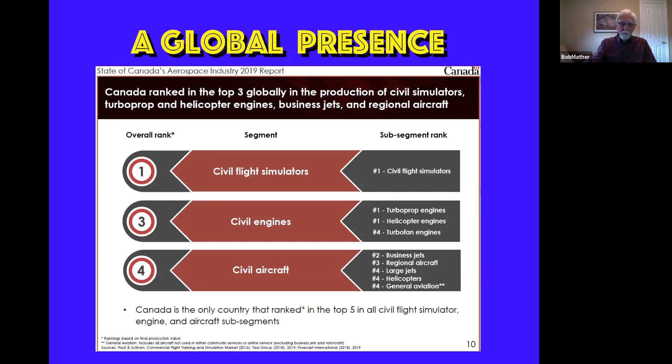Where does all this success come from? This comes from a gradual work over the years by many, many people. So I'm going to take de Havilland as an example of the way this success has appeared. Going from the Tiger Moth to the Q400, I call that a success story.

My career was mainly in engine design, manufacture, and certification, so there'll be a little bit of a bias towards that. We're going to take a somewhat narrow look at the industry, really. There's many other companies like Bombardier and Bell and CAE who've contributed their part as well. So we're going to take a look at what de Havilland has done over the years to start with.

1936 to 1945 is an example of how a branch plant of a foreign company builds success. Early de Havilland aircraft were shipped across the Atlantic in crates, assembled and test flown and shipped to their customers in Canada.

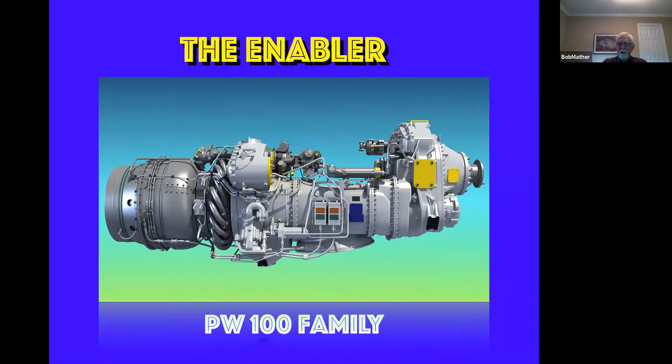I'm going to spend a little time later explaining where this engine came from and why it was designed the way it was. But first, I'll briefly go over the history of aircraft engines and aircraft propulsion.

Starting with the Wright brothers in 1903, they designed and built an engine of their own that produced 12 horsepower. They were smart because they thought their airplane would fly on only 8 horsepower, so they had a little power in hand. Won't dwell on that, because their success and what it led to is obvious.

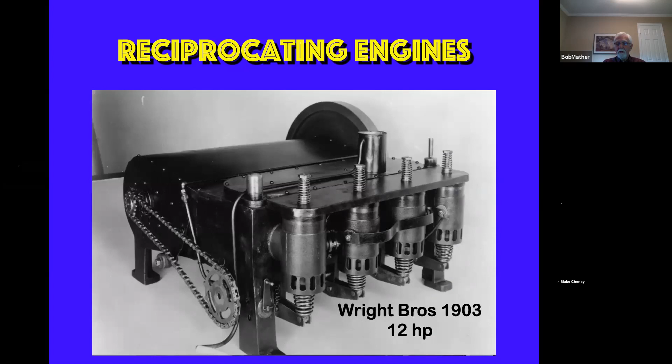As aircraft got more utilitarian and bigger and more useful, there was a need for more power, so they simply added more cylinders and made the engine progressively bigger. From 1903 to 1923, you've gone from 12 to 300 horsepower in the form of a large 12-cylinder engine built by Rolls-Royce.

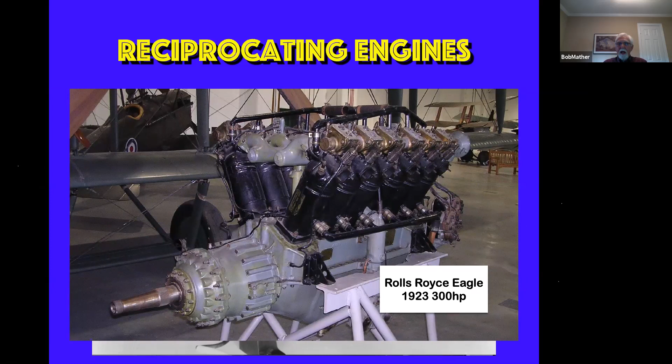The trend for adding cylinders and increasing performance continued, and somewhat later there's this radial engine with 18 cylinders. The performance and power-to-weight ratio was improved by adding a supercharger, which you can't see, it's at the back. The addition of a supercharger gives the engine more power at higher altitude. This is clearly an advantage in military terms, but also a great boon for civil aircraft, which can then fly at somewhat higher altitudes out of the weather.

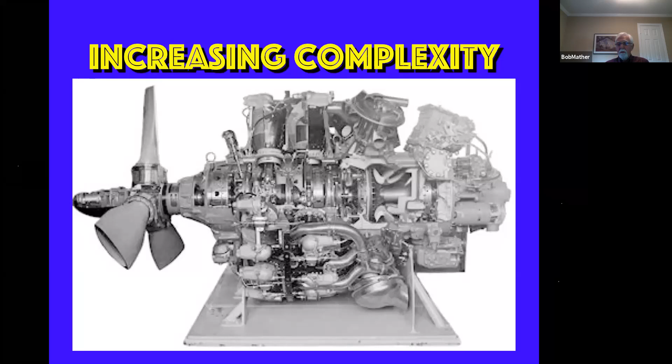This is kind of like going around in circles, but that turbine is coupled to the compressor that started the process off, which is also geared to the front of 2 propellers. So you've got a turbine system driving one propeller, the piston system driving a second one, and these are rotating in opposite directions for a perceived gain in propulsion efficiency.

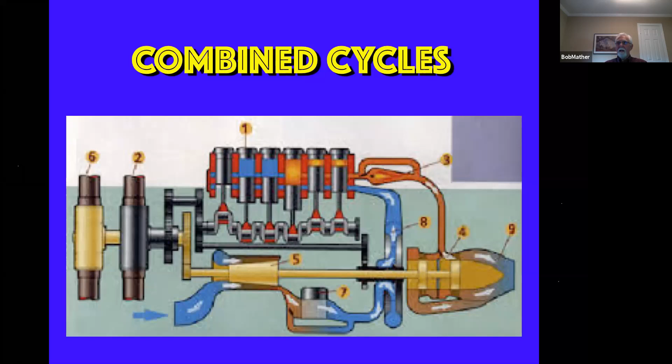This engine was called the Napier Nomad, and this is a picture of the engine as it was built. You can see the big bowl-shaped thing at the top right, that's the combustion system, and at the bottom, with the opening, is the turbine stage. The cylinders, laid out in opposing format, there are 12 of them. So you can see the complication of 12 cylinders, a combustion and turbine system, and 2 compressor systems.

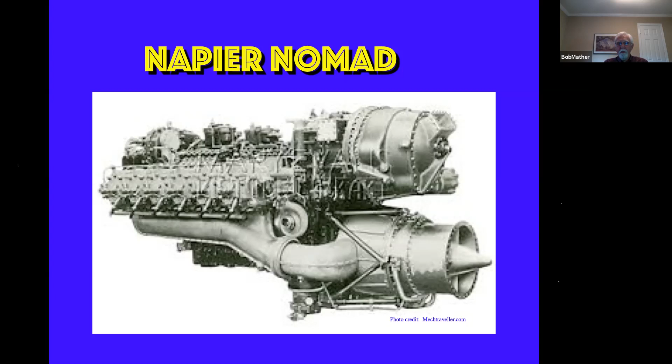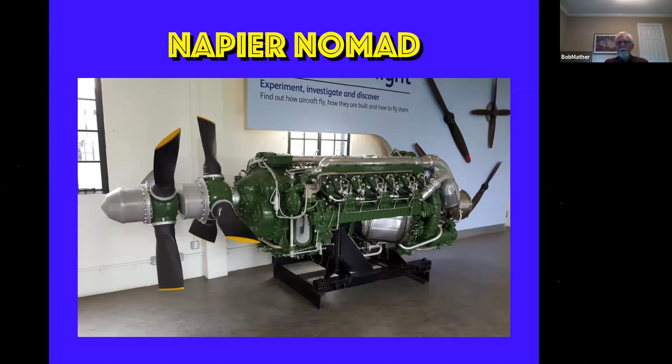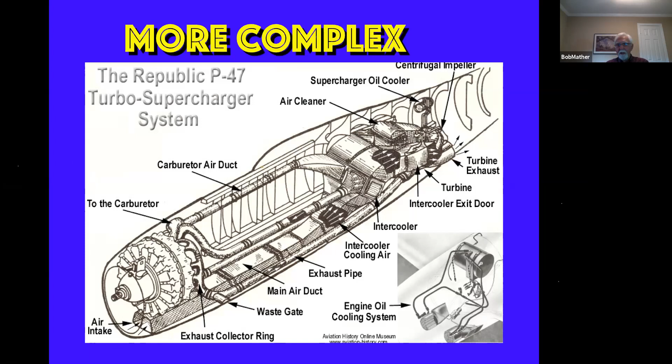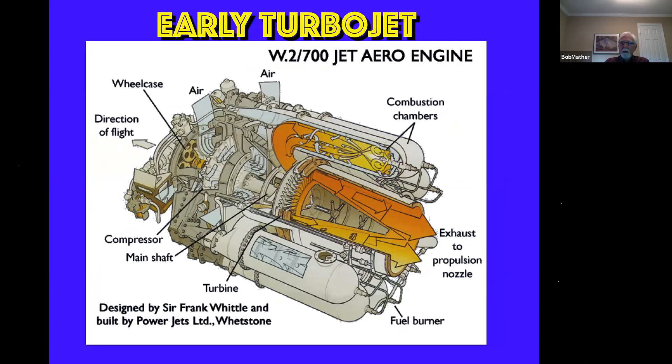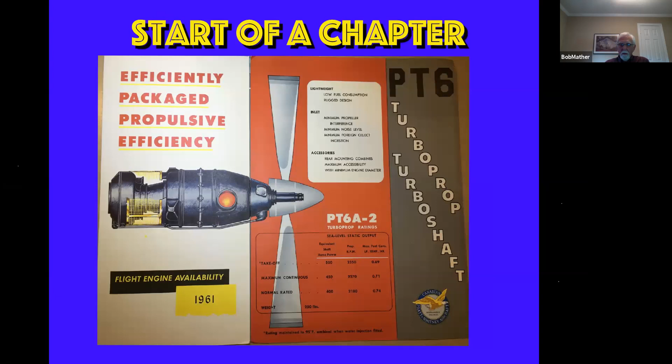Adding a gearbox and a propeller to the turbojet design of Sir Frank Whittle did not materially add to the complexity. Now this family has gone on to become an icon for the success of the whole Canadian aerospace industry.

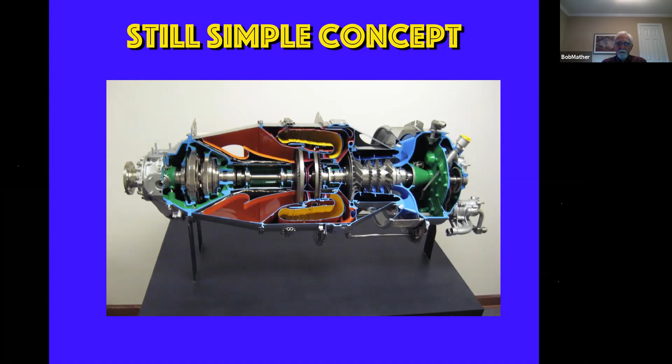Where does an engine like this come from? Who starts the process off? We'll talk about that in a little bit.

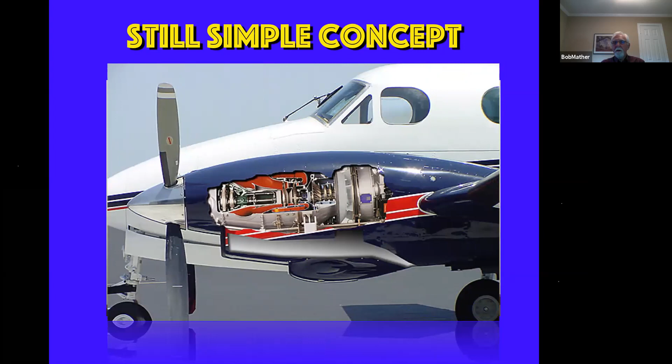The PT6 itself was a success right across the board. We have it in passenger aircraft, agricultural aircraft, utility, military trainers, and high-speed personal transportations.

I talked about the PW100 as being the enabler. Well, where did that engine come from? It really has its genesis in the Beech King Air, really. This was a successful aircraft powered by the PT6, designed and built by Beech.

Their competitor in the marketplace was Cessna. That company had an eye to build a competitor to the King Air, but they wanted something a little bit bigger and a little bit faster. And there was some dialogue between Pratt and Whitney Canada and Cessna about building a 2,000 shaft horsepower engine.

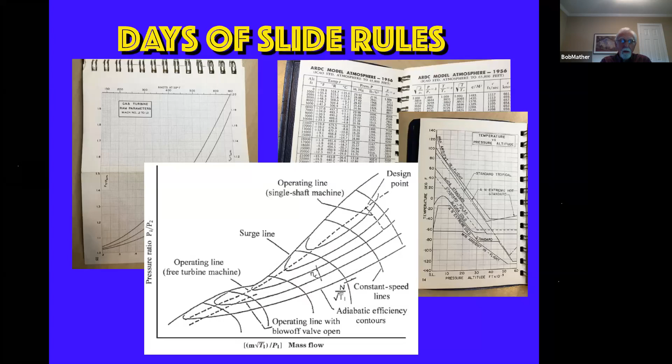So the state of the art in analysis at that time was just hand calculations using slide rules and hand calculators.

The early days of computer applications meant that experimental data could be harvested, non-dimensionalized, and scaled to use for technological forecasting. It was now possible to do true parametric analysis.

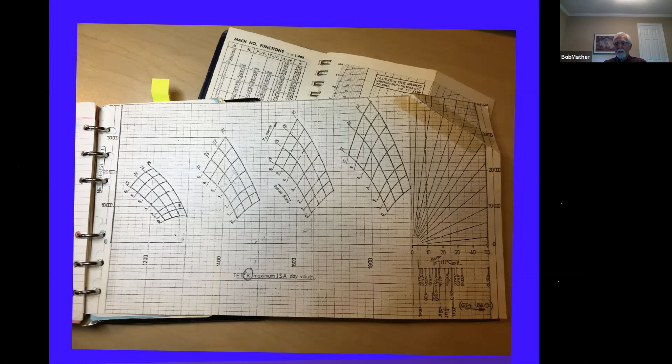As soon as the schemes to do practical calculations came in, this is a sort of chart that people produced. It's hard to see from where you are, I'm sure, but you've got several hundreds of gas turbine cycles calculated here over a range of pressure ratios, turbine inlet temperatures, and mass flows. So the computer schemes were quite a breakthrough in that engine cycle optimization was really possible rather than impractical.

So I've said we moved from hand calculations to true cycle applications. Now, some of the considerations of that were the technology risk. The design and building of an engine is something which takes place over 4 or 5 years, maybe even longer these days. So to do a series of calculations at one technology level is risky. You have to be able to forecast what the technology is going to be in terms of pressure ratio, efficiency, materials, and so on, when the engine goes into production to remain competitive.

The other consideration is where to optimize the cycle. Since we've said we can now optimize the cycle, where to do that? Will it be takeoff, cruise, or some intermediate condition? In the case of small turbofan engines, small turboprop engines, the engine is required to pressurize the aircraft as it flies. The bleed air to pressurize it is a loss to the cycle, and it's necessary to take that into consideration. It was not possible to do such detailed calculations when we were using a slide rule and charts.

There's also a performance risk, because if the performance is not accurate, then the guarantees that the airline customers will require would not necessarily be met. So you'll be selling an engine to guarantee a certain horsepower level at a certain fuel consumption level. So there's technology risks, there's a decision to be made as to where to optimize the engine cycle, and then pitching the performance so as to be competitive in the marketplace is also important.

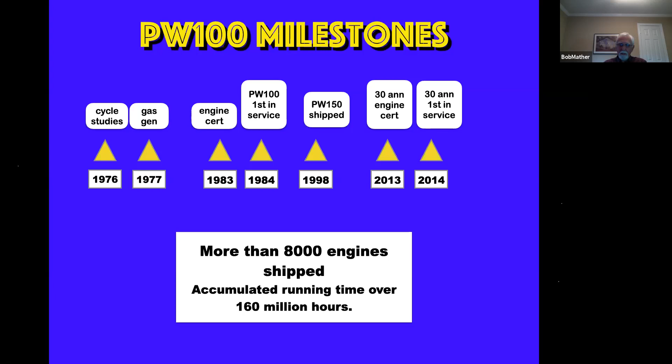In summary then, from the engine point of view, the PT6 family is still going after 6 decades. It's grown with the industry from about 500 to over 1,500 shaft horsepower. And it's a focal point for an industry, the industry's reputation. Despite what the company thought in the early 70s, it doesn't need a replacement. And the Pratt and Whitney 100 family fits in alongside the PT6 quite nicely. And it's still the leader of the pack after 30 years. I think the PW100 is a worthy successor to the PT6.

In summary about our industry, it's a major contributor to Canada's GDP. It's a world leader in simulators, aircraft, rotorcraft, and engines. And I haven't mentioned before, but it's similar in size to the air transportation industry, the automotive production industry, and oil and gas, and mining and quarrying. So we sometimes lose sight of the fact that Canada's aerospace industry is a major contributor to our GDP, and I hope it continues.